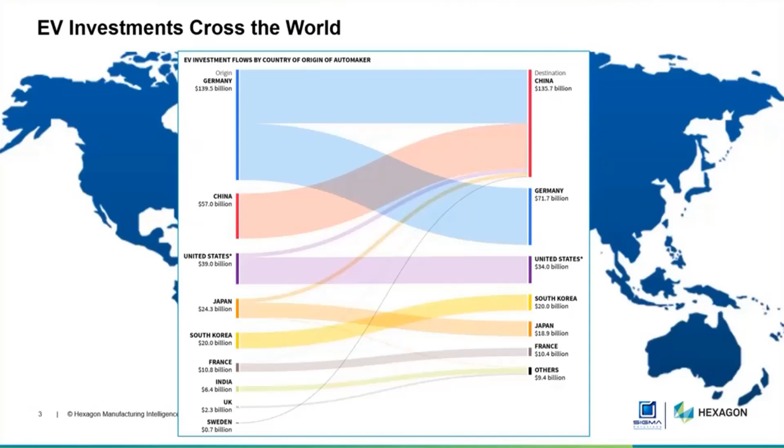So it is a trend that has globally moved the automakers worldwide into a certain direction, which is fulfilling the SDG requirement, Sustainable Development Goals requirement. So in global economy, many companies are suffering due to the shocking event of COVID-19 especially. Many may reserve to invest. They don't want to invest.

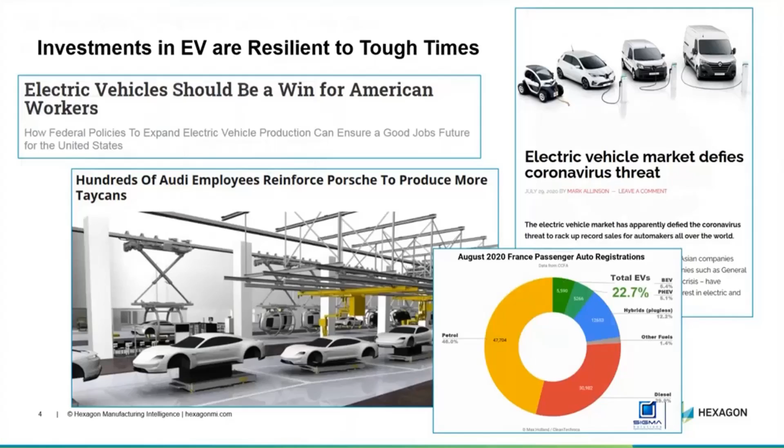This news shows how serious OEMs in the global market are investing in this strategic investment, which is electric vehicle. There have been losses, for example, by Daimler when they faced the diesel-related issue and also the airbag issue previously. So how they want to compensate this and at the same time invest into electric vehicle is that they are looking at cutting costs by laying off people worldwide and take that fund to fund the electric vehicle development.

So same goes with Audi. They're looking at laying off around 9,500 employees within 4 years and divert the investment into the electric vehicle program. Now, we look at the ASEAN-related electric vehicle investment news. In ASEAN, the push for electric vehicle, especially in Thailand, has been put on the major oil companies. So, for example, I think many of us read that Thai oil major company PTT has launched a $60 billion push into electric vehicle and also the green energy.

So we see that the trend from developed countries is coming from automotive OEMs, but in emerging or developing countries like ASEAN, it's coming from non-automotive mainly. So both governments and industry are working hand in hand to push for electric vehicle development. And I believe Thailand especially has the most advantage in this segment due to the complete automotive supply chain as a result of 30 years collaboration with automotive makers, especially with the Japanese.

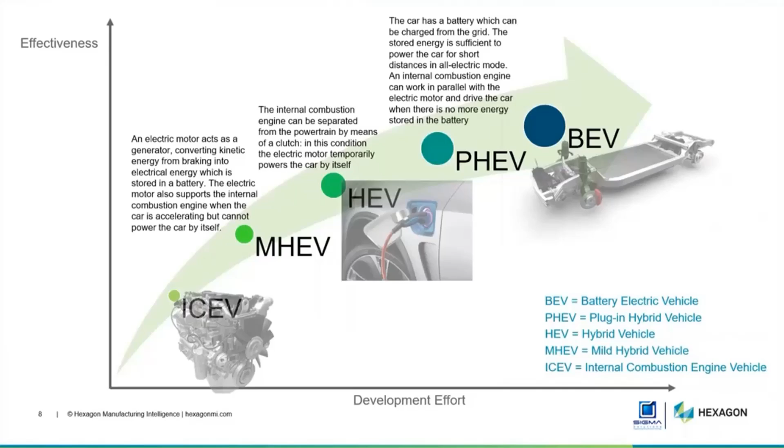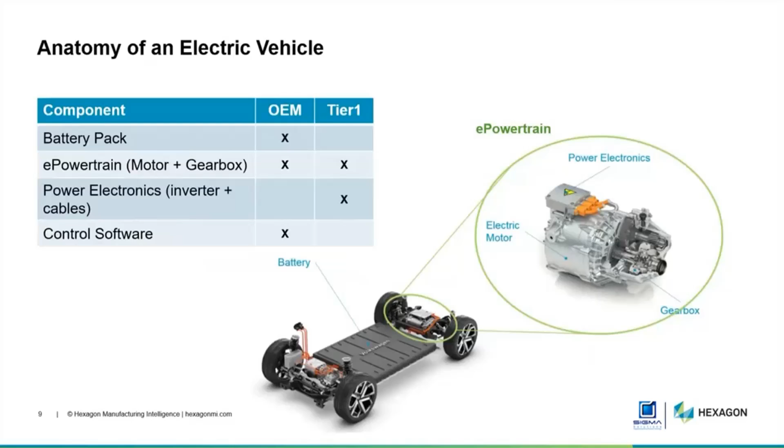So never as today, the auto industry needs to fully leverage the power of simulation and also measurement in their design and engineering solutions. Let's take a look at the anatomy of an electric vehicle. There are a few main components such as the battery pack, normally developed by the OEM, the e-powertrain that consists of motor and also gearboxes, which is developed by both OEM and tier 1 suppliers. Power electronics are mainly developed by tier 1 suppliers, but the control software is mainly developed by the OEM.

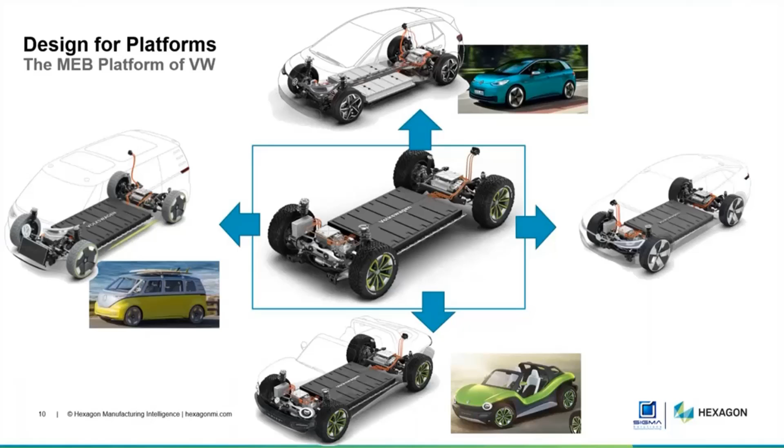Not only Volkswagen, there are many other OEMs looking at this modular approach to reduce the cost of electric vehicle development. Putting the battery at the bottom, they call it a scale modular approach to develop and introduce various models in the market. Then we look at the taxonomy of energy storage itself. Of course, we have the battery cell, then the combination of cells becomes a module, then the assembly of modules becomes a pack.

Let's take a look at the design and manufacturing challenges. First of all, let me go directly into the core contents of the discussion. One of the main challenges when we talk about electric vehicles is the all-time issue of range anxiety. This topic is the main challenge for many nations to adopt electric vehicles as part of the sustainability roadmap. Engineers are tackling this issue through various subtopics such as optimization of the powertrain, improving battery thermal management to increase efficiency, applying lighter materials to reduce battery consumption, and reducing tire rolling resistance, similarly to reduce battery consumption.

The other key issue is related to manufacturing and quality assurance. For example, a modular manufacturing approach might require rearrangement of the supply chain. Extensive lightweighting might require manufacturers to think about joining dissimilar materials, for example, steel with aluminum with plastics. So digital twins actually open up the opportunity to integrate direct feedback from the field into product design as actionable items.

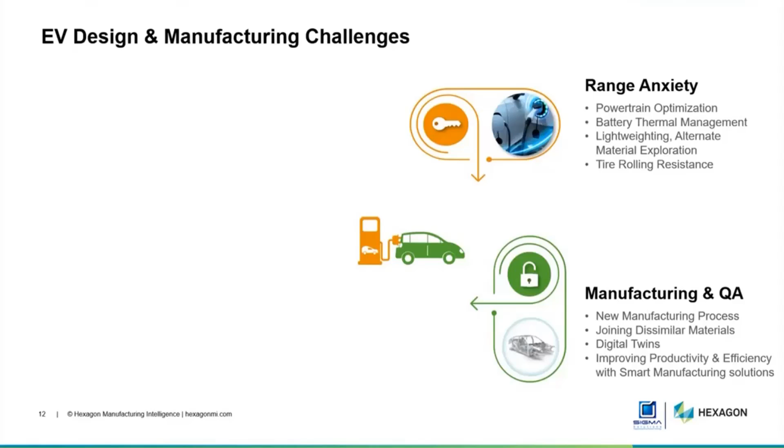We're also looking at driver and passenger experience. What we can see here is that the electric vehicle is actually perceived as a luxury car, a car that is full of electronics. So the expectation of the driver towards the quality and experience inside the car is very high. The demand for cabin comfort, the cabin noise must be reduced, the car must have more electronic functionality. These demands are growing when people want to purchase an electric vehicle.

So finally, when we achieve all these, we need to have better performance of the car. For example, performance on acceleration, and this leads to the issue of torque vectoring because previously it was based on the combustion engine, but now it's changed to the electric motor. It also leads to NVH, durability issues, and especially the safety issues of the battery.

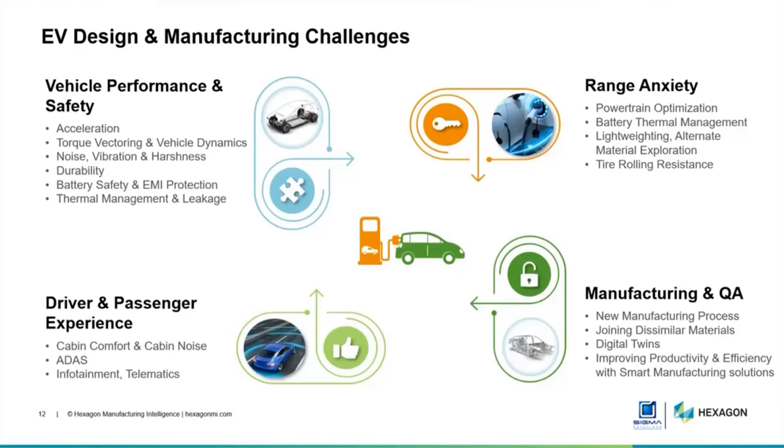Then when it comes to design and engineering, in MSC we have various solutions to assist engineers to solve these issues. If you look at the electric vehicle, whatever new components are installed compared to a conventional internal combustion engine, these are the key components that come together with new challenges. So Hexagon has a solution to address each segment in electric vehicles. For example, on lightweighting, we focus on the material. On battery thermal analysis, we have the solution called Cradle to simulate the thermal flow around the battery, and also the thermal flow in between the modules and the pack of the battery.

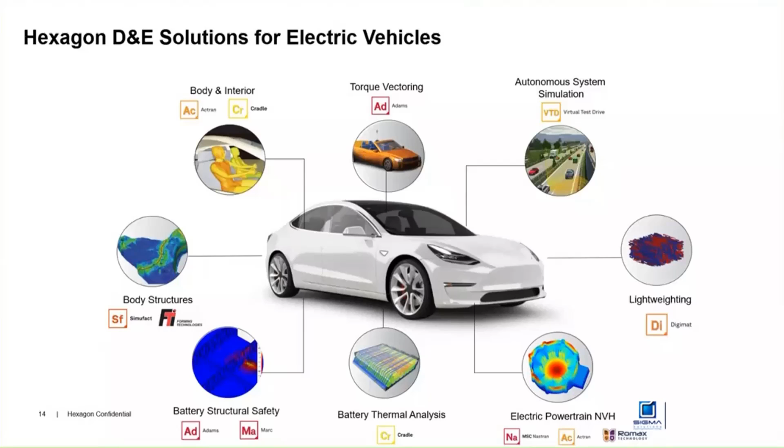And we're also looking at the noise generated by the electric powertrain and harshness. We also have a solution that can address battery safety when the car hits any bump on the road, because the battery is installed at the bottom of the car, so it is prone to hit any bumps that the car goes through. The issue is that the battery consists of lithium ion, and if it leaks, it has the potential to explode, right? Or the potential to create a fire inside the battery and create a hazardous situation.

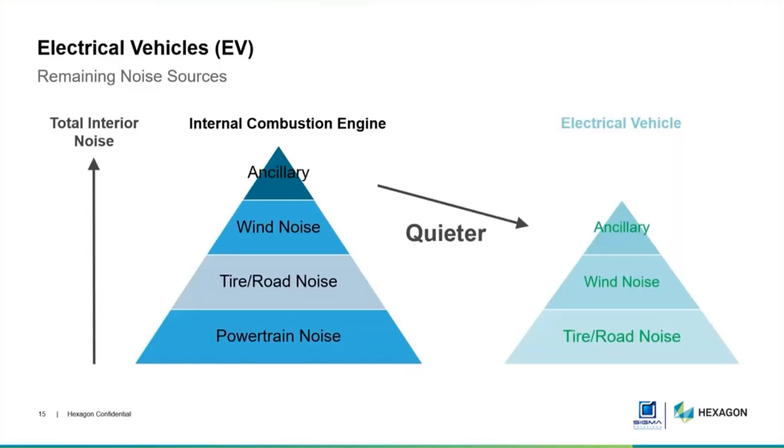Now let's put a little focus on electric vehicle noise. In this series, we are going to look at some solutions related to acoustics and noise. Obviously, one of the main sources of noise in a conventional vehicle is the engine, and therefore removing the engine and replacing it with an electric motor means a huge reduction in the noise source. But is it that simple? Well, the answer is actually no; a new set of challenges appear for engineers to solve.

When things become quieter, the smaller marginal or incremental noise becomes more obvious and sometimes very annoying. You can imagine that in a quiet place, for example during the night time, if water leaks in the toilet, even if it's a very small sound, it will become very annoying to the owner of the house, right? Sometimes it becomes very irritating.

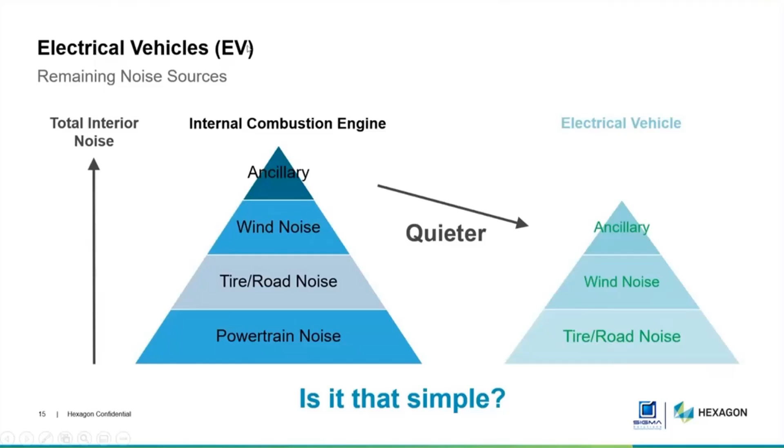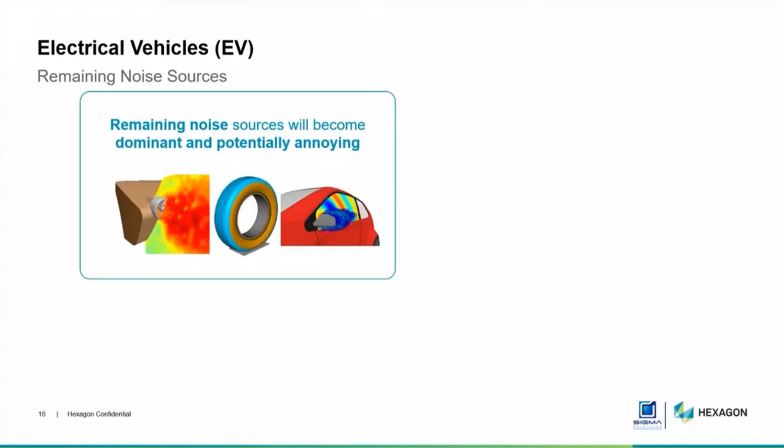So with the removal of the internal combustion engine, there are remaining noise sources that need to be addressed. They become dominant, as I explained earlier, and some of them could be noise from the air conditioning system, noise coming from the tires, or wind noise through the side mirror. And this requirement is further amplified by the passenger's perceived expectation of the electric vehicle as high tech. It has to have better sound quality than the internal combustion engine. One of the main sources of noise comes from the electric powertrain itself.

However, reducing the total noise could also impact pedestrian safety, and there are around 20,000 accidents related to electric vehicles in the US alone. I forgot the year, but I think around 2018 or something, where people do not realize that the electric car is coming towards them and just cross the road. So it has to have some sound that can alert pedestrians that the car is coming. Because electric vehicles reduce noise, pedestrians are not aware of the incoming vehicle.

So authorities are now putting requirements on electric vehicle manufacturers to ensure that EVs emit a standard noise with the objective of warning pedestrians of the incoming vehicle. It could be approached with an artificial sound machine or any type of sensors to make a sound.

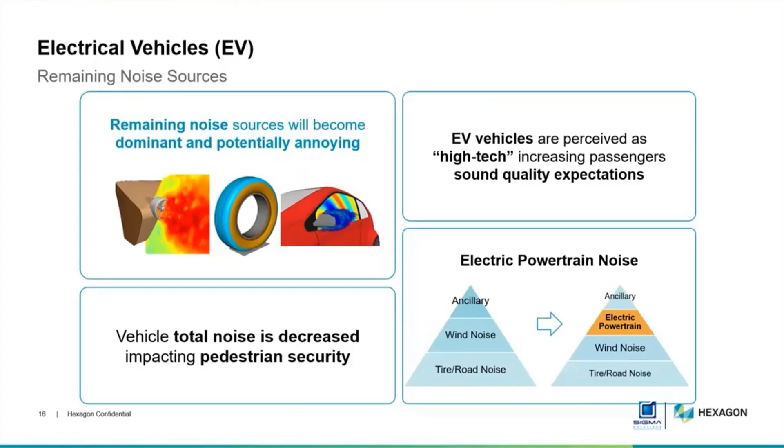Dealing with noise, vibration and harshness issues, we have two approaches. One is the firefighting approach, and the second is to anticipate the problem at the design stage and perform various types of simulation or testing. Of course, the first one would be difficult because you have to bring the car back and make the changes. But the second one is also not easy because the designer has to anticipate potential problems which don't exist yet. So together with engineering experience, the problem can be tackled early, before prototyping, by means of simulation. Simulation offers a better solution to NVH design. Okay, so simulation can help to understand the potential physical phenomena by replicating the actual physical scenario.

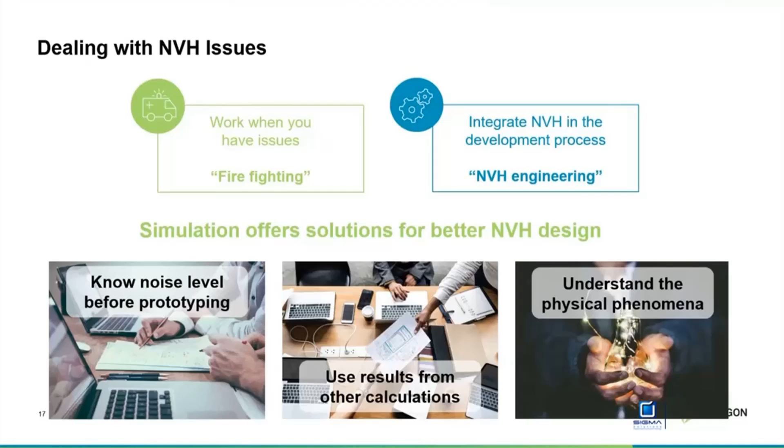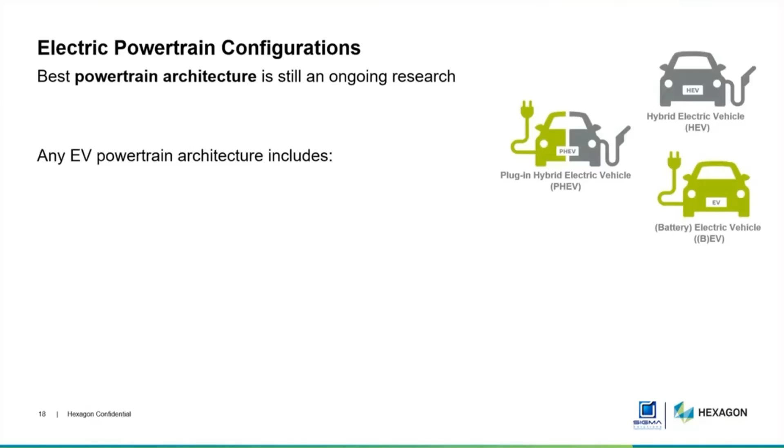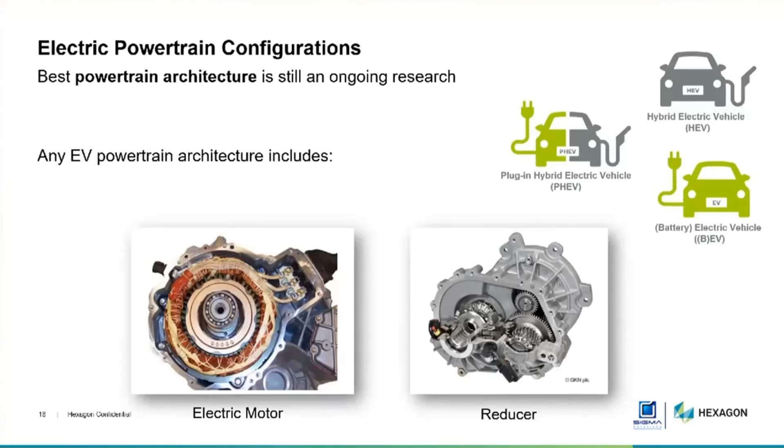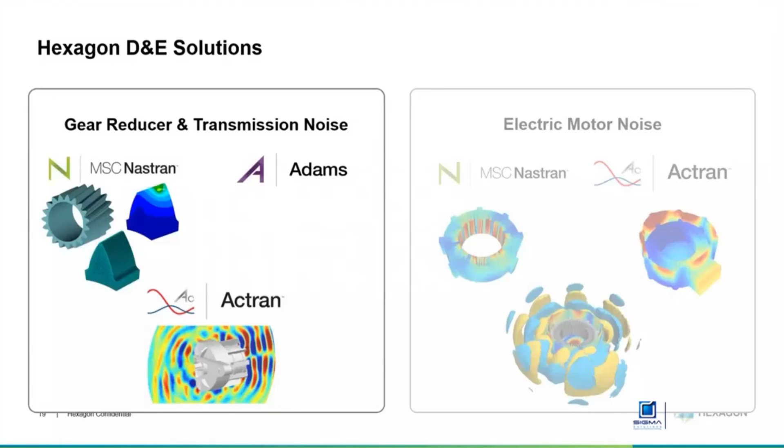For the different electric powertrain technologies, research is ongoing on finding the best architecture, either HEV, PHEV, or the battery electric vehicle itself. But basically, there are two main components inside the electric vehicle. One is the electric motor, and the second is the gearbox or reducer. In order to address the noise coming from these two components, we can look at the gear reducer and transmission noise, and also the electric motor noise. So let's take a look at the first approach, which is to address the noise coming from the gear reducer and the transmission.

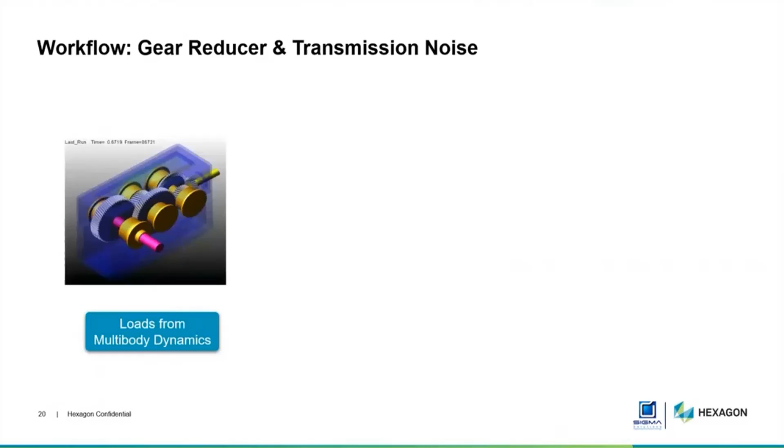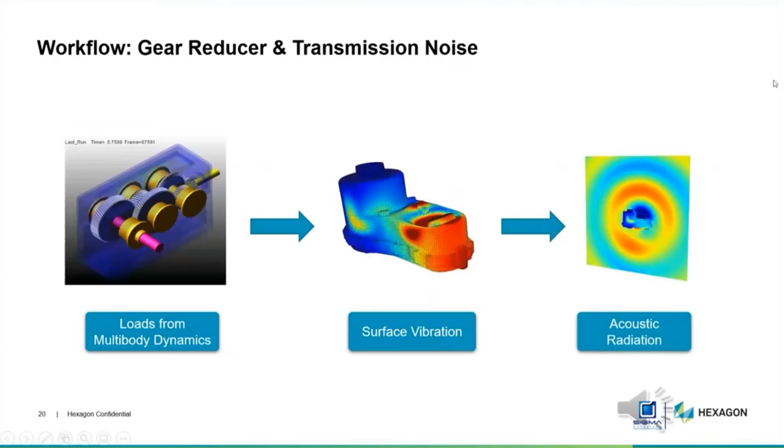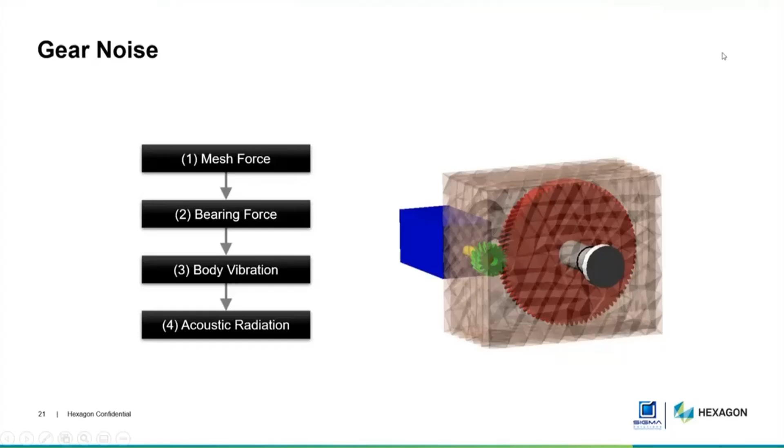We have a workflow that can help you simulate the noise coming from gearboxes. In this case, we are using ADAMS to simulate the motion and the forces when the gears are contacting each other. Okay? The loads come from the multi-body dynamics simulation, the vibration is transmitted into the surface vibration of the gearbox, and the vibration is transferred or mapped to the acoustic radiation simulation. In detail, we get the mesh forces and bearing forces, translate them into body vibration, and then calculate the acoustic radiation from the surface vibration. These are examples of gear rattle noise sources coming from the contact forces between the gear teeth. You can see a spike in forces when the gear teeth contact each other.

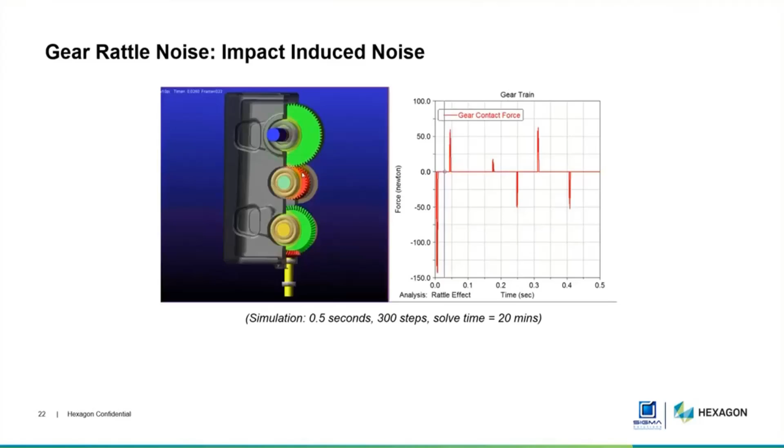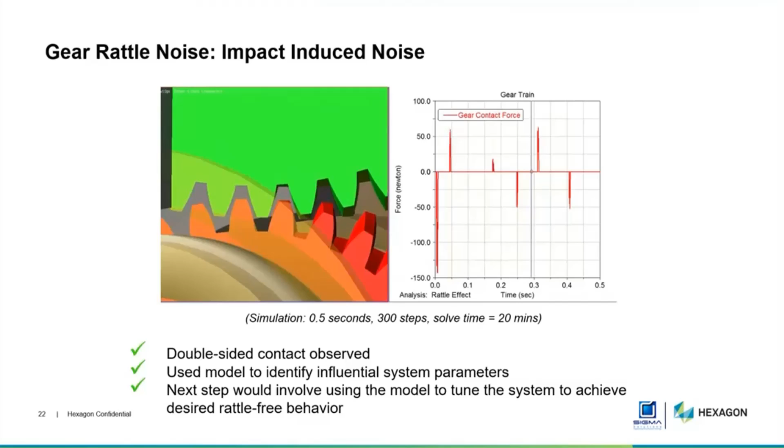So there is a double-sided contact observed. We can use this model to identify the influential parameters, for example, the pitch or the teeth tip of the gear. And the next process is to tune the system to achieve the desired rattle-free behavior.

MSC as a solution specifically can address the noise coming from the gear tooth. This is a toolkit they call GearAT, and GearAT supports a very accurate description of the flank surfaces, and this was considered necessary, as GearAT should be able to provide reliable information about the contact mechanics and its associated design parameters related to the gear itself.

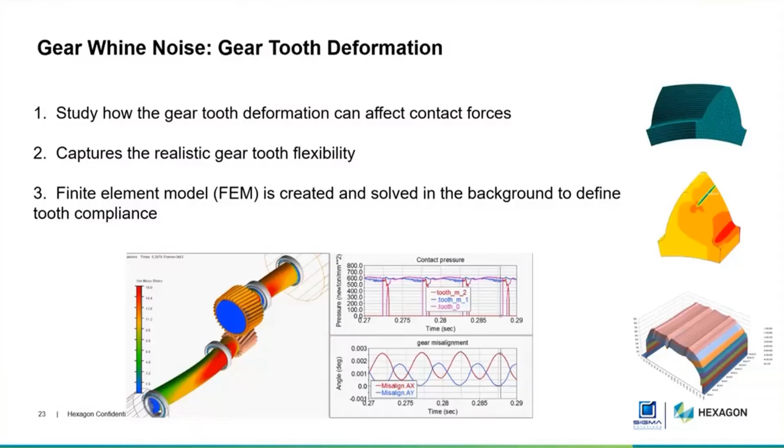So GearAT can help you to produce results in either low frequency or high frequency domains. And the concept is very realistic, and it actually helps not only expert users but also non-expert users to understand how to design the gears and make sure that you are fulfilling the sound or noise requirement of the vehicle or the gearbox.

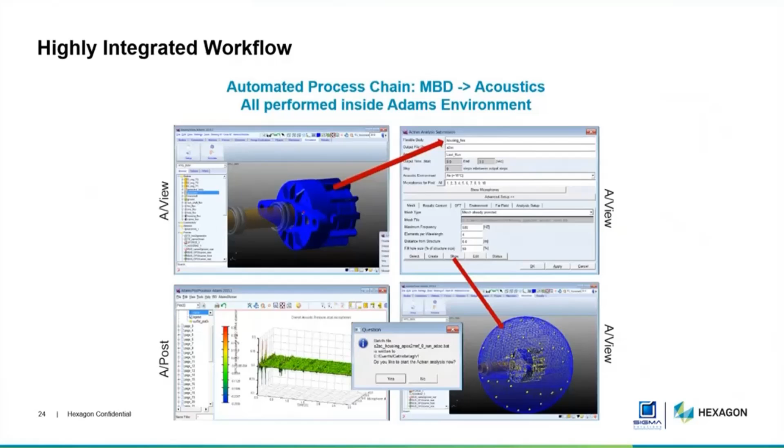Now I just want to give you this short demo related to the chain simulation from multi-body dynamics to Actran acoustic simulation. The simulation is done 100% in one environment, which is Adams, by using a toolkit called Adams to Actran. So this is the demo video that shows the simulation in the Adams multi-body dynamics environment.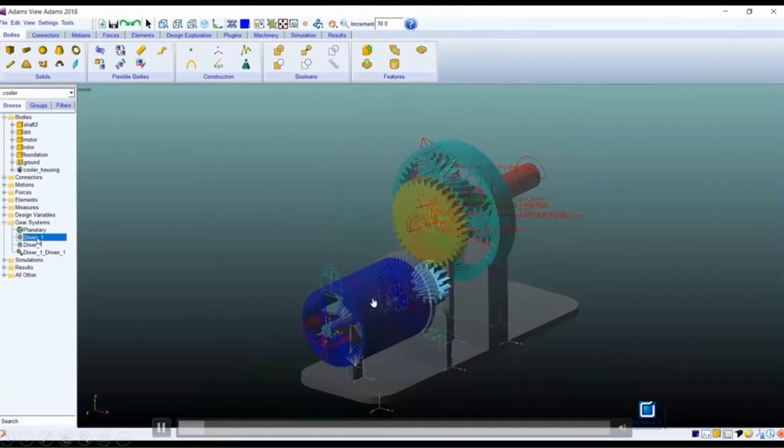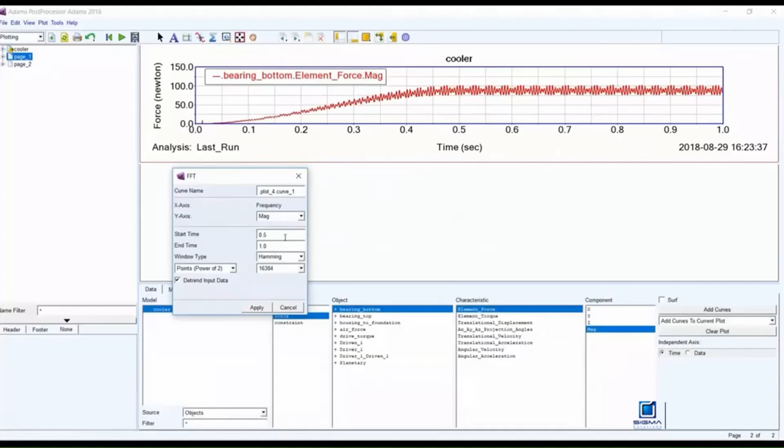First by importing the gear set, and you can see the blue component is actually a finite element model inside the multi-body dynamics. This technology has been there for many years, but what we will see after this is that the forces reaction between the bearing and the gears can be translated or mapped into vibration. And this vibration is mapped into the acoustic noise simulation.

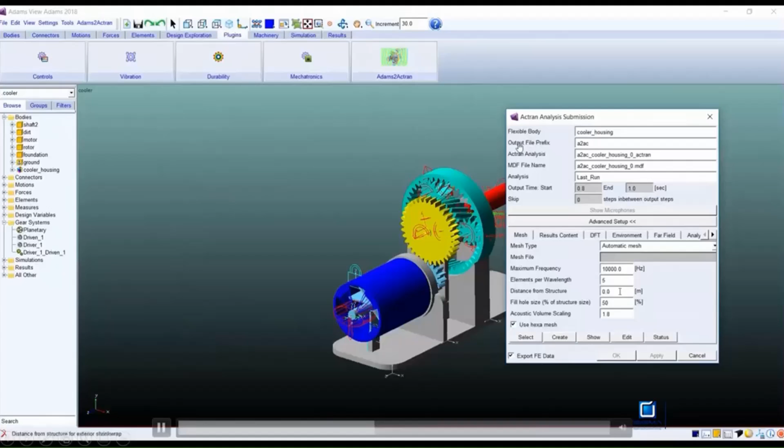So we have this plug-in toolkit, we call it Adams to Actran, and you just choose which part you want to calculate the vibration for, then the toolkit will ask you the range of the simulation time, and you can perform the noise simulation itself. So this is the toolkit that we have inside Adams to Actran. Right, let me skip a little bit.

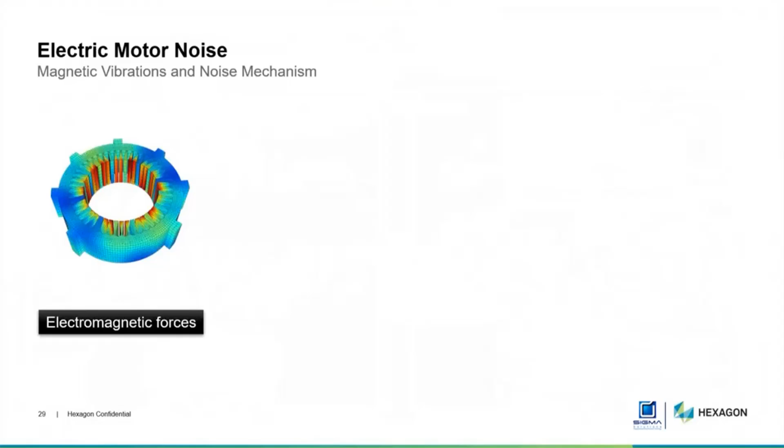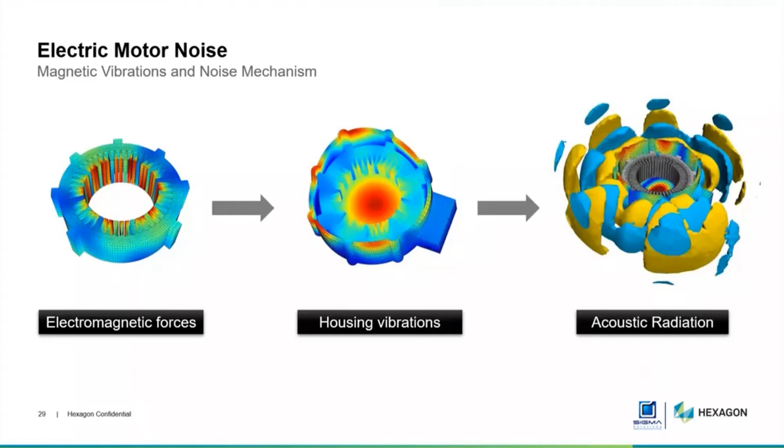I just want to show another example of electric motor noise. We have this solution to address the noise coming from the electric motor. But before that, we need to understand how electromagnetic forces create noise. The forces come from the electromagnetic forces, and then they generate vibration towards the housing. And from this housing, we can take the vibration to calculate the acoustic radiation.

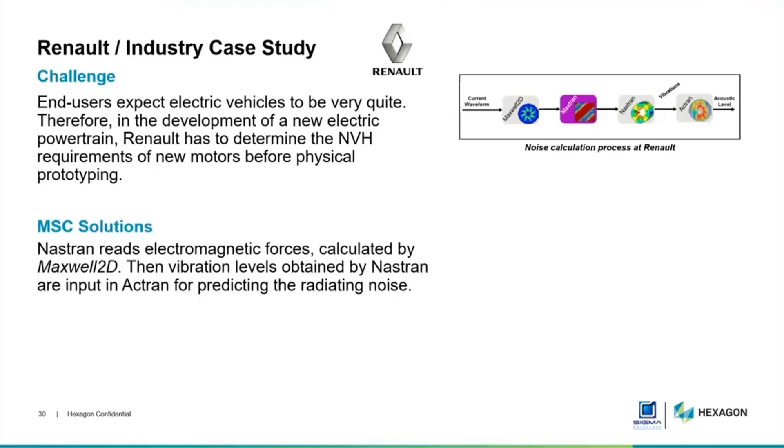One example that we can show here comes from Renault on electric vehicle noise simulation. As we mentioned earlier, the challenge in electric vehicles is that the absence of internal combustion exposes other noise sources that were previously acceptable but now become unacceptable. The end user of course expects the EV to be very quiet, and therefore during the development of the new electric powertrain, Renault had to determine the noise level and reduce the noise before physical prototyping.

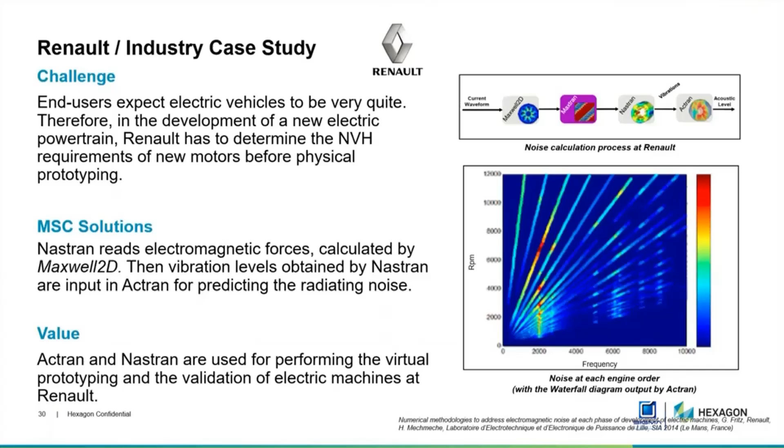Okay? Of course, in terms of generating the electromagnetic forces, Renault is using third-party software to perform this type of analysis. So next, there are many other sources of noise and related phenomena. In an electric vehicle, which is perceived as a luxury vehicle by many buyers, noise is perceived as a quality issue, and it must not appear inside the car.

There are noises such as those coming from the dash, top door rattle, rattling rear deck, roof squeak, hood rattle and squeak, dashboard vent, driver door squeak. Many of these already existed in internal combustion engine vehicles, but previously were acceptable because they were masked by the internal combustion engine. But now, because the engine has been removed, these sounds become more obvious to the drivers.